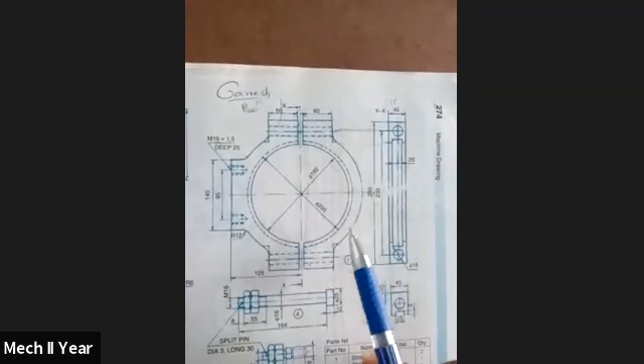See, this one is the eccentric diagram. So here, eccentric - this is the side view or top view. You can see this one in this position.

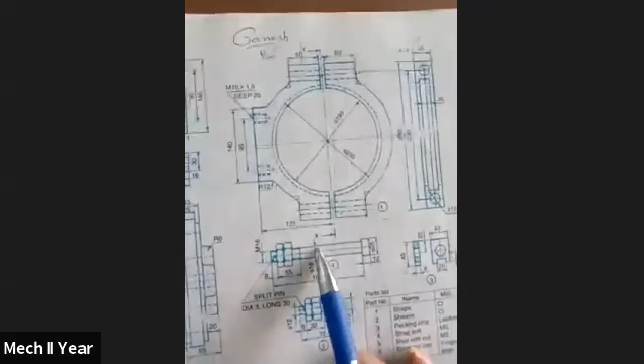So here the title box lists: straps, sheave, packing strip, strap bolt, stud with nut, eccentric rod. So these are all the parts. Now this one is called the eccentric main part.

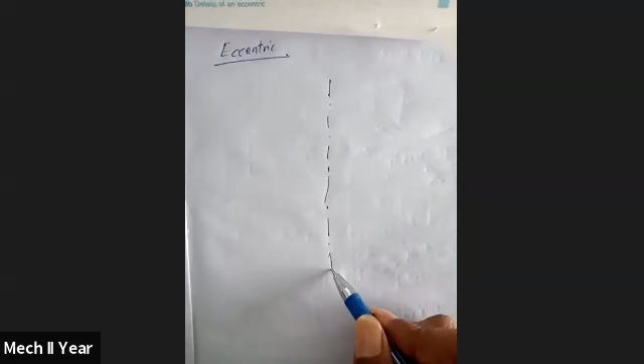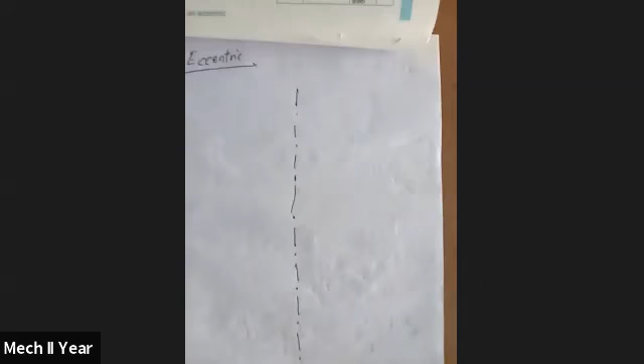So first you're going to see the basic diagram. Here I am going to draw the eccentric.

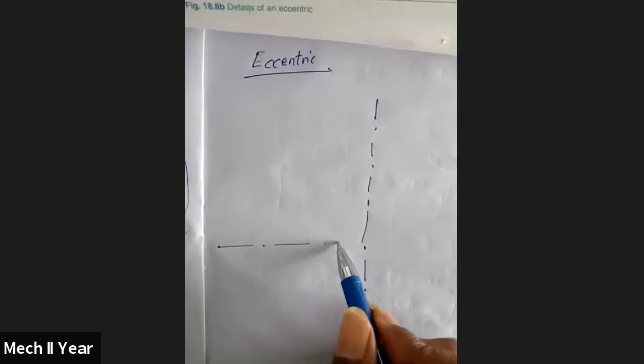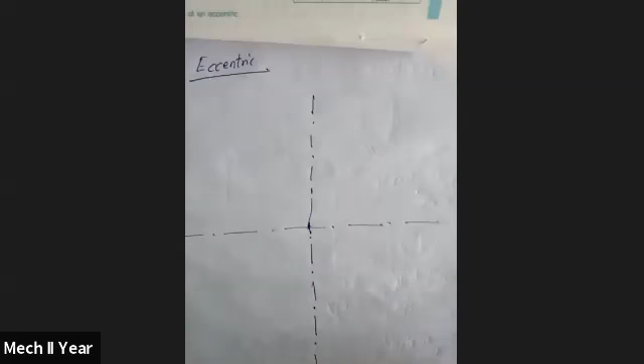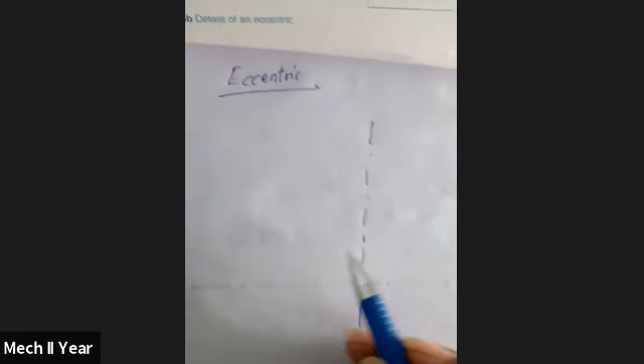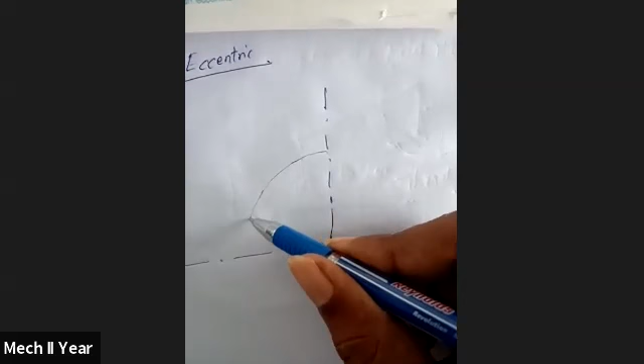Okay, so first take this page at the middle portion. In the middle of the page I'm going to draw the first axis line. After drawing the axis line, the second axis line.

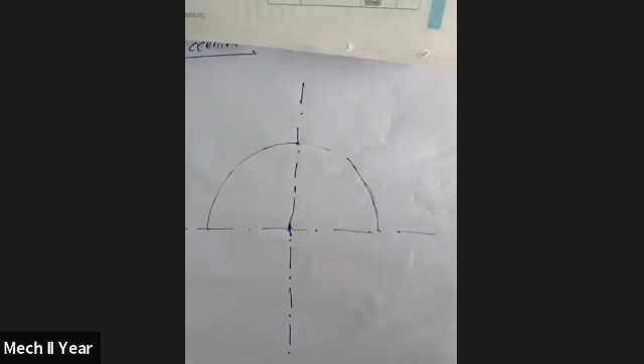Just extend this - the plus point is the important thing here. This is the center. Take this center, draw the first circle coming from here.

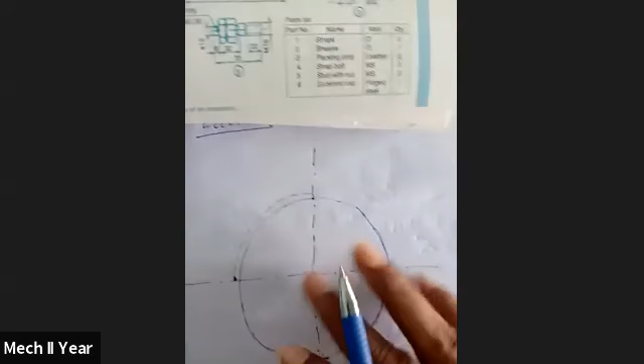This is 190 by 2. So 190 by 2 - now I'm going to draw the circle like this. Since you'll draw it with a compass, it will come out exact and neat - don't worry.

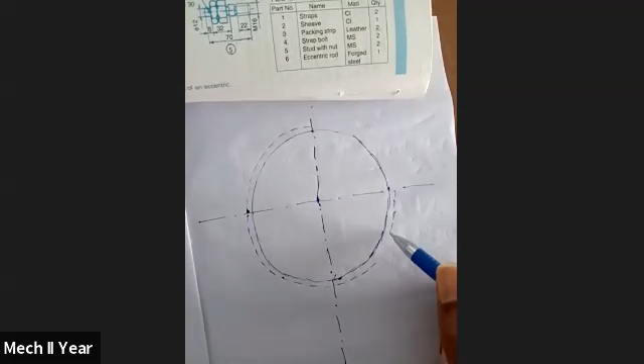Okay, so this is the circle, and next we see here 200 - so 200 diameter is there. So I am going to take 200, meaning 100 radius, and draw a 100 radius circle.

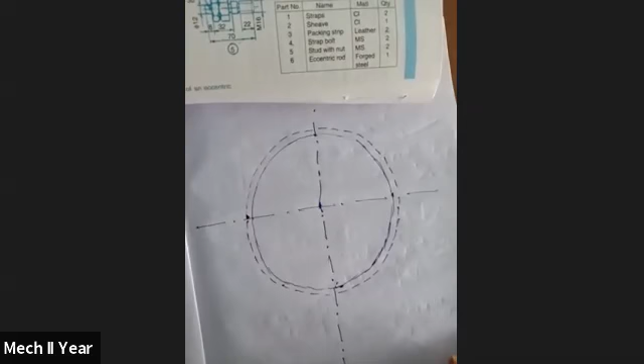Since the picture shows dotted lines, I am also going to draw dotted lines.

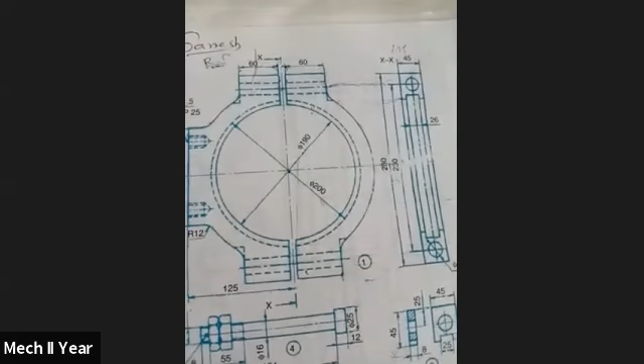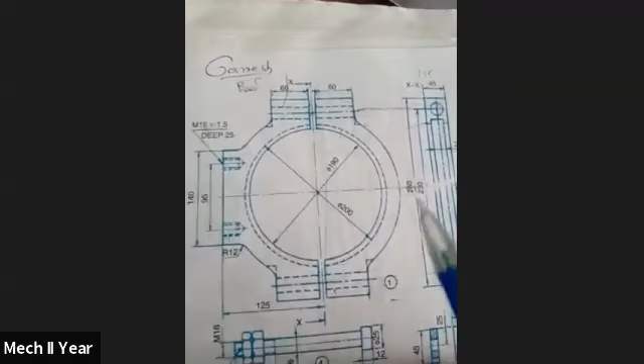Like this, and now we are going to see another circle here. So what is that circle's radius? I want this circle - we need to know how much this circle will be.

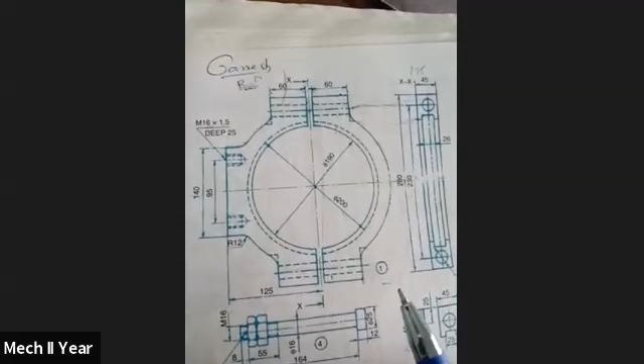In the side view it's given here to here as axis height, and this one also axis height, so that is not required.

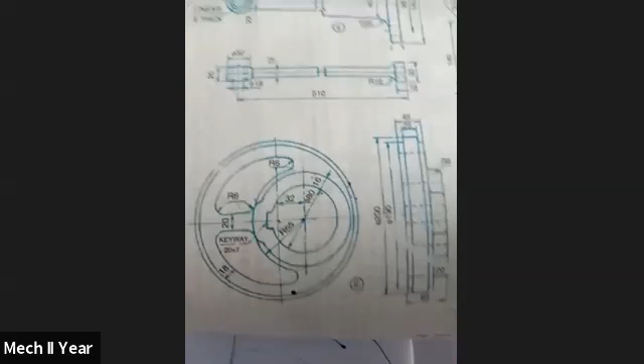So axis height is there, and here to here end is 125. The total height of this diagram is 280, but now we need this one here - entirely we need this circle.

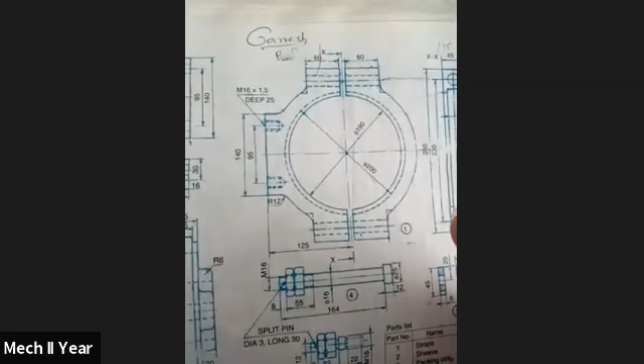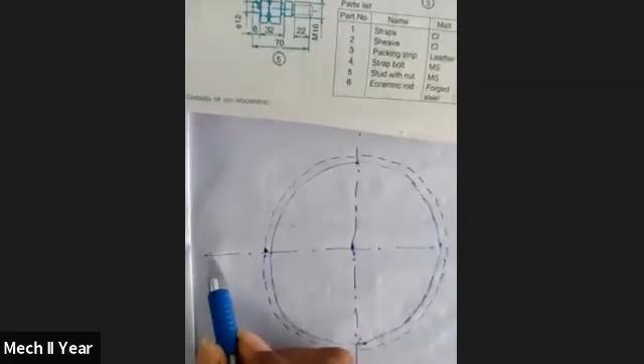So I'm going to check where the circle diameter is, and now here is the inside of the circles. One is 200 and 190 - that's already drawn, so no problem.

But here we see we need this circle - there is no given point here. Nowhere is the dimension mentioned for this.

So okay, no problem, now what to do? Here we see some gap is there, and how much gap we should maintain here also we should know - but that's also not given.

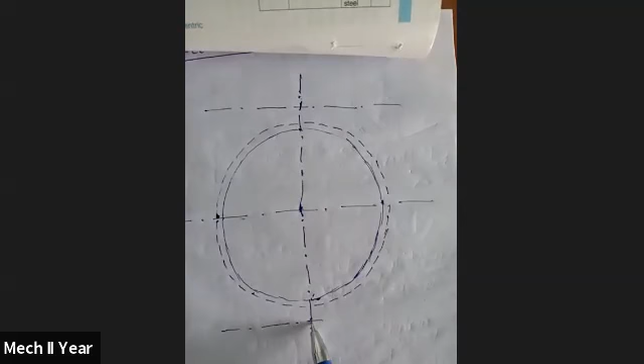Okay, now here 125 first - I'm going to take here to here as 125, that is the entire maximum length of this. So I'm going to draw one construction line for that.

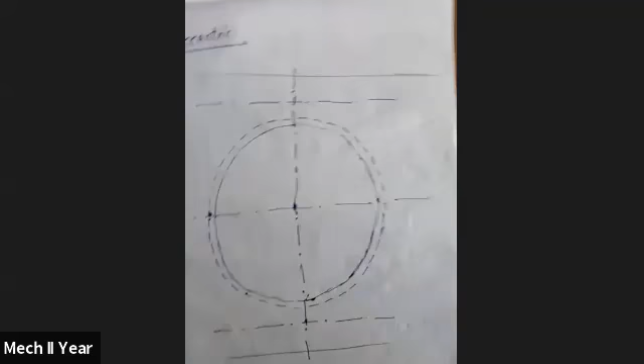Okay, like this. And then we see after that 280 is there - here we see 280 and 230. So 230 means half of this - half of this 230 means half of the length. Here I am going to draw one axis line.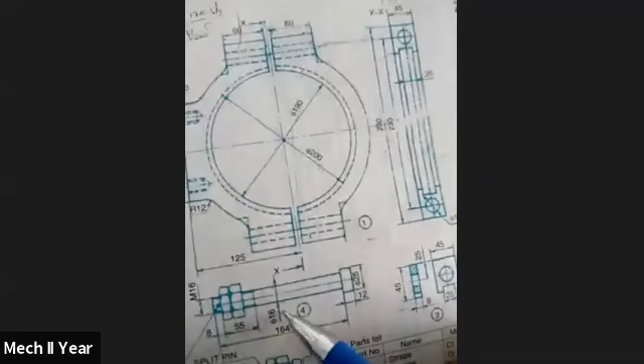See one axis line. The similar way I am going to draw the bottom also. This is the axis line. Now I've completed two axis lines, and the maximum position is 280.

Then I'm going to take here 140 length, and here also 140, that will come to 280. This is the maximum height of this picture.

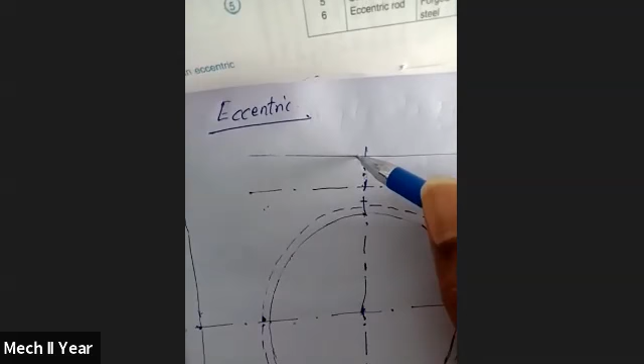Now we see here very clearly, 280 is over. The picture we'll see here. Now this is the distance. How much distance do we need?

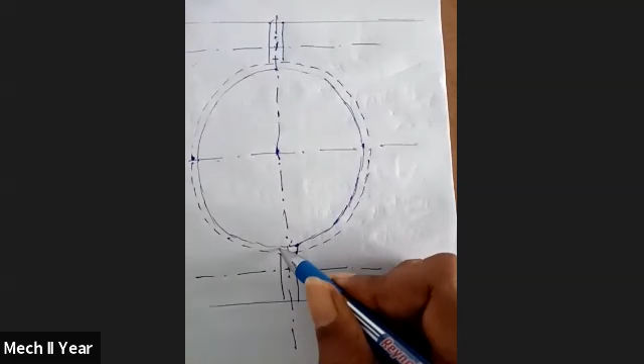16. See here clearly, this one is called 16. So then I'm going to draw here 16, means 8 and 8. So axis above, I'm going to take 8, and axis below, I'm going to take 8.

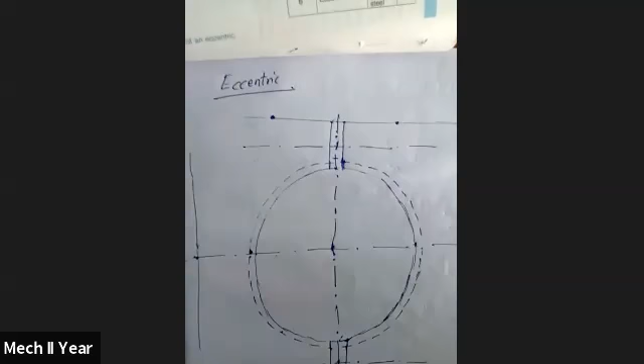Now this is the x-axis. So what is the distance now? Here to here, I am going to take this gap approximately. This is 2mm, 4mm, and this is 4mm. 4 or 3, take your convenience, because this is a separate part and this one is a separate part.

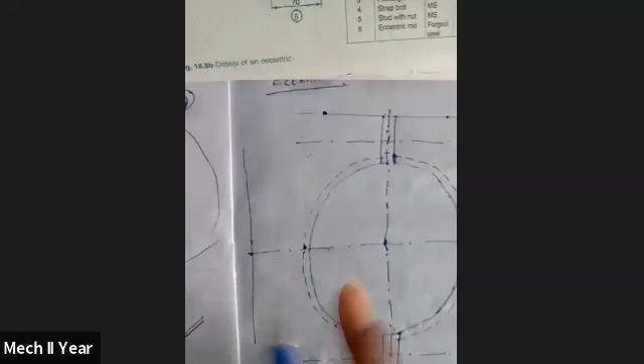So these both are separate parts, that's why we can take our convenience distance. Not much more, take convenience distance like 4 or 3 mm.

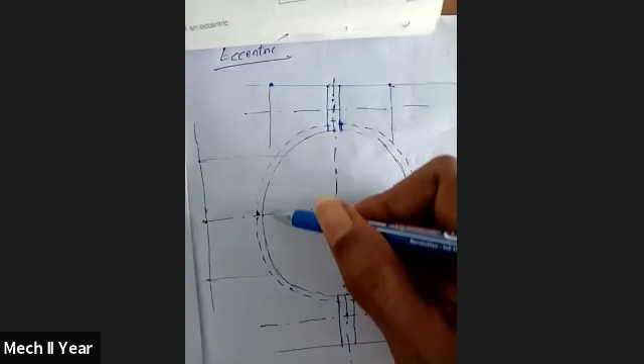And now here we see here to here is 60, and here to here also 60 is given. See here, 60 and 60 is given.

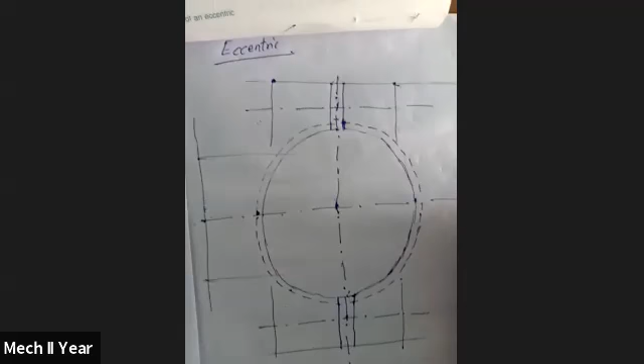And at the same time, now the height, here we see 140, there are 2 lines, 140. So this line I am going to take 70 height, and this one also I am going to take 70 height. So one horizontal line, and here also draw one horizontal line.

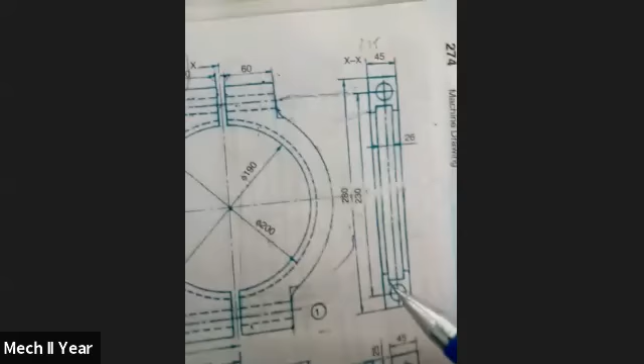And here also I am going to draw vertical lines like this. Take parallel lines, put the drafter and draw the lines, because this is the point.

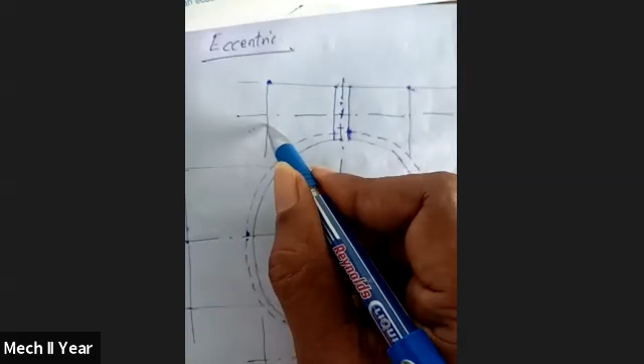Now here we see the entire diagram is almost completed, but we need this circle. We need this circle, so we can take this circle also.

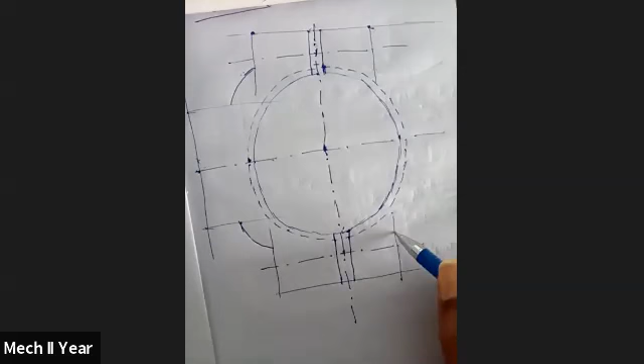It is taken as it is. There is no given circle, but here is 230. See, this height is 230, this axis to this axis is 230. Then you can take the circle also having 230 diameter. The circle is having 230 diameter.

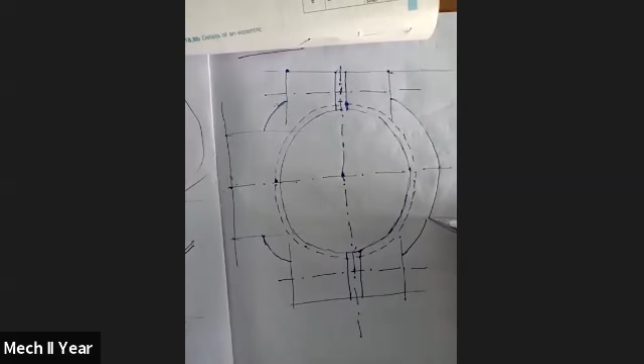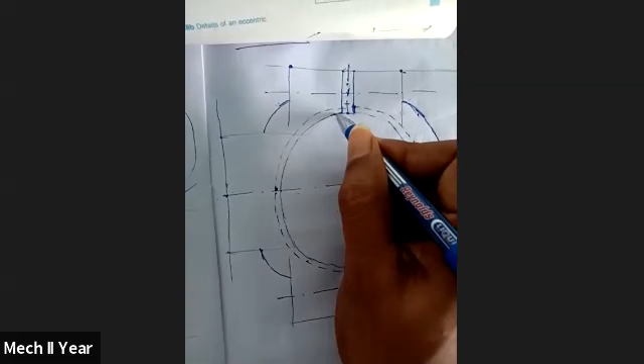Then here, this point to this point you can measure. Take compass and draw like this. That is the outer line. And then completely you can draw. Put compass here and draw this like this.

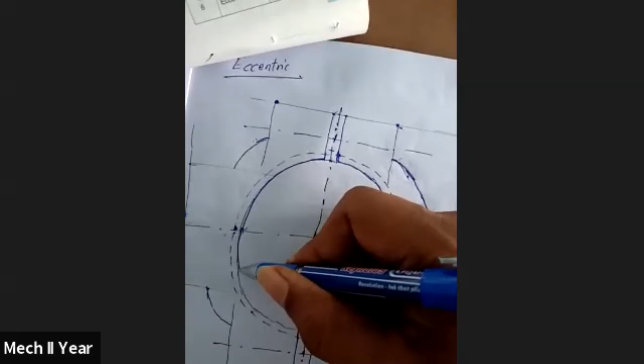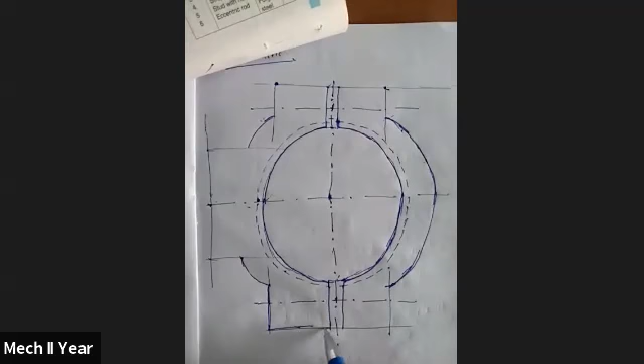And now this one, it will come like this. So here you can draw the circle like this. Take HB pencil and draw dark. Now here also you are having a dark line, so just highlight this one.

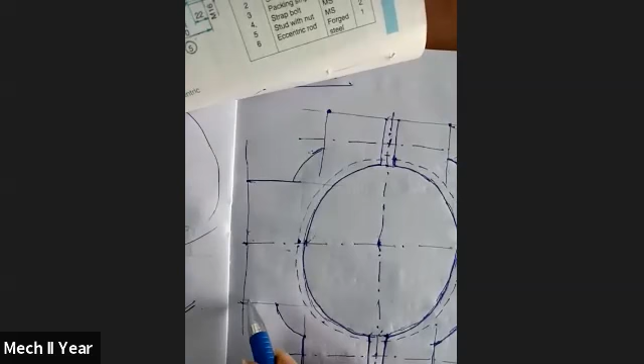Take HB pencil and draw this line. So now it will complete, totally it's completed. Now here also we are going to take HB pencil, take scale and draw this line straight. Okay, here this is HB pencil.

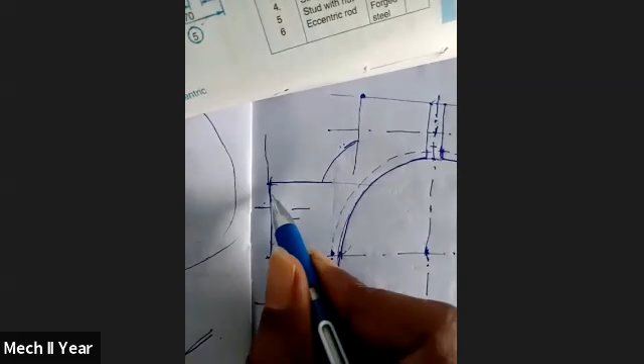Now this one is highlighted, at the center this one. Here also, and come to here, this one is highlighted. This is the part we are going to highlight.

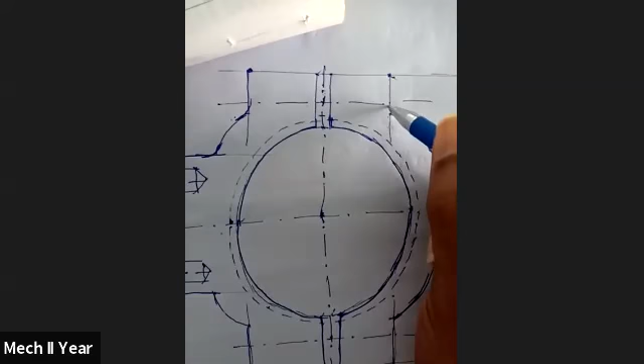Like this. And then now see here axis 95 is there. Above axis and below axis, 95 means you can take half of this and draw the axis lines.

And then now here we see some of the distance M16. You can draw like this.

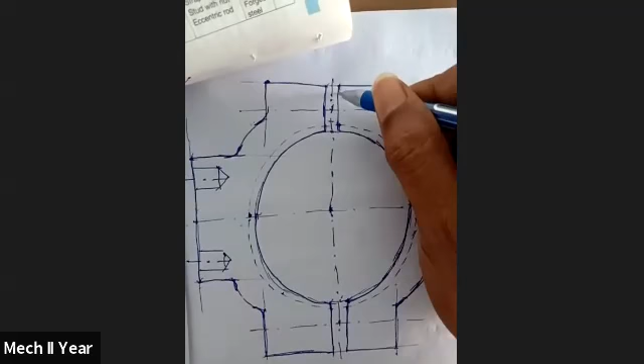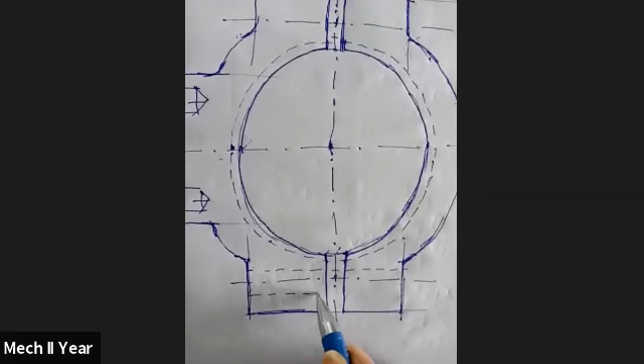See, and now here also you are going to highlight this. Take radius, convenient radius. Here also you can take convenient radius. And then here also you are going to take convenient radius. This one also you are going radius.

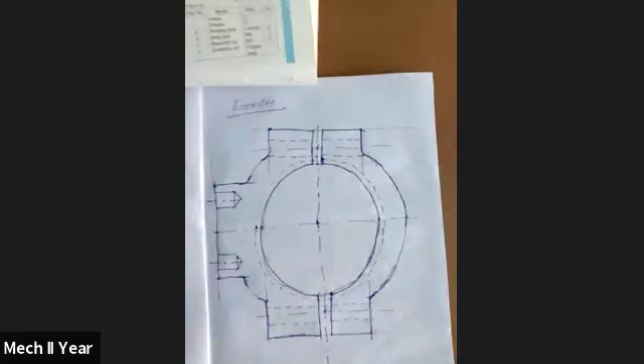And here also fillet, here also fillet. Now see, this is the complete picture. Now we are going to draw these hidden lines.

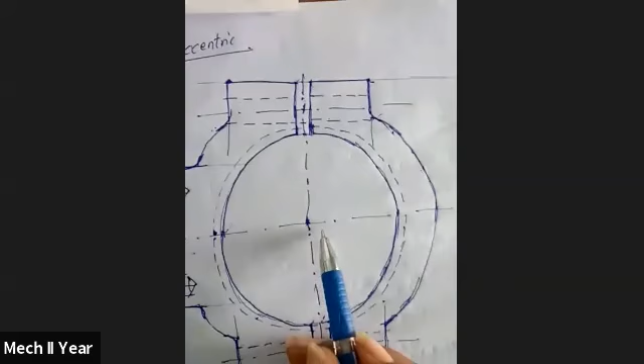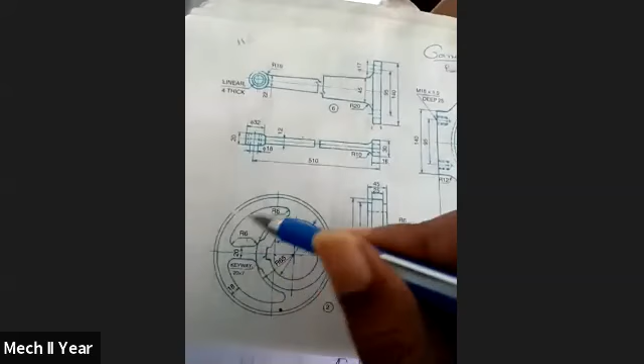What is that? M16, then above 8, and below 8, like this. Similarly here also, like this, and this one.

So now see, this is the complete diagram for eccentric. See this one.